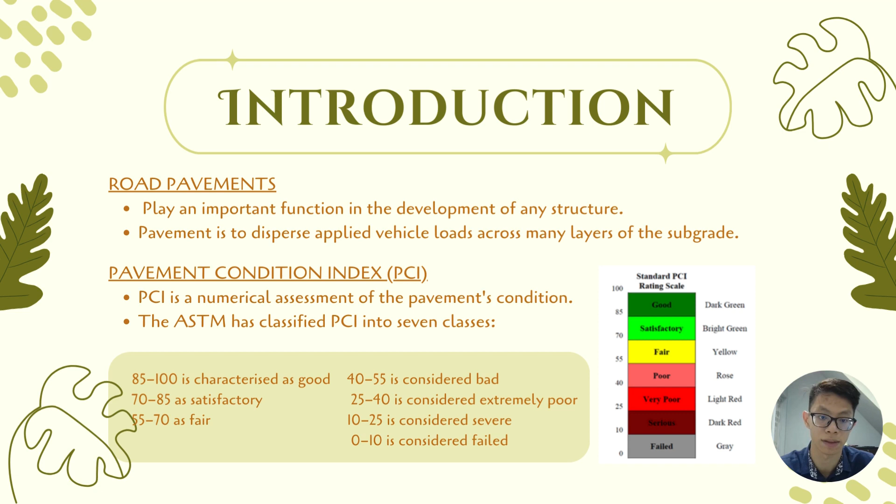The ASTM has classified PCI into 7 classes: 85 to 100 is good, 70 to 85 is satisfactory, 55 to 70 is fair, 40 to 55 is considered bad, 25 to 40 is extremely poor, 10 to 25 is serious, and 0 to 10 is considered failure.

The objectives of this investigation are to determine the pavement condition performance in terms of PCI and identify the type of distress along a 1 kilometer road at Taman Manis, Parit Raja, Johor, and to study the maintenance and rehabilitation methods to improve the road pavement condition.

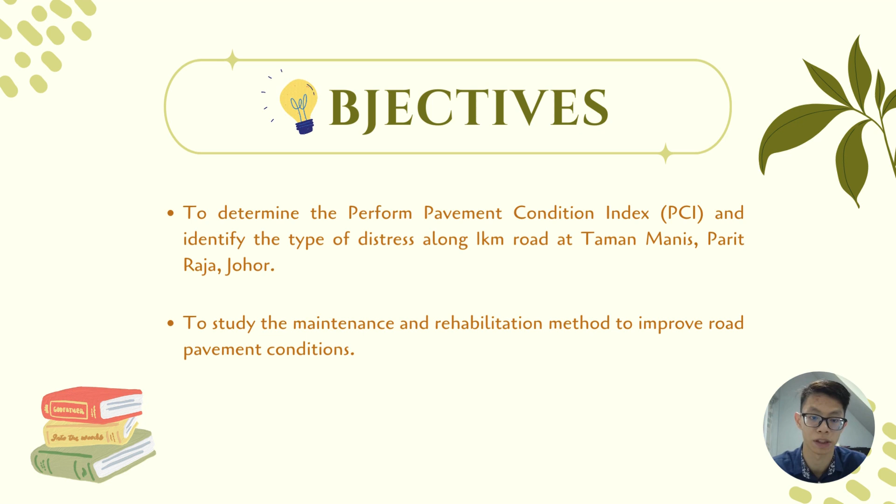Literature review. The Pavement Condition Index serves as a crucial part of road infrastructure for ensuring safe and effective travel. In groundbreaking research by Vitalis Ndume (2020), the traditional PCI methodology was revolutionized by incorporating 9 distress criteria and the International Roughness Index. The findings revealed that combining factors for PCI assessment provides more accurate results than relying on a single parameter.

Muhammad Saleem Zafar (2019) conducted a condition survey on a national highway, using visual distress assessment to estimate PCI. Uncovering 10 out of 19 pavement failures, the study identified potholes, rutting, block cracking, and more.

Next, a study from Professor Dr. Fareed M.A. Karim (2016) evaluated the Al-Fiush road in Yemen, using the Pavement Condition Index as a comprehensive method for identifying surface distress. The study provided crucial insight into route health, and was significant in its strategic approach to maintenance and rehabilitation, tailoring solutions based on the specified distress type and severity level.

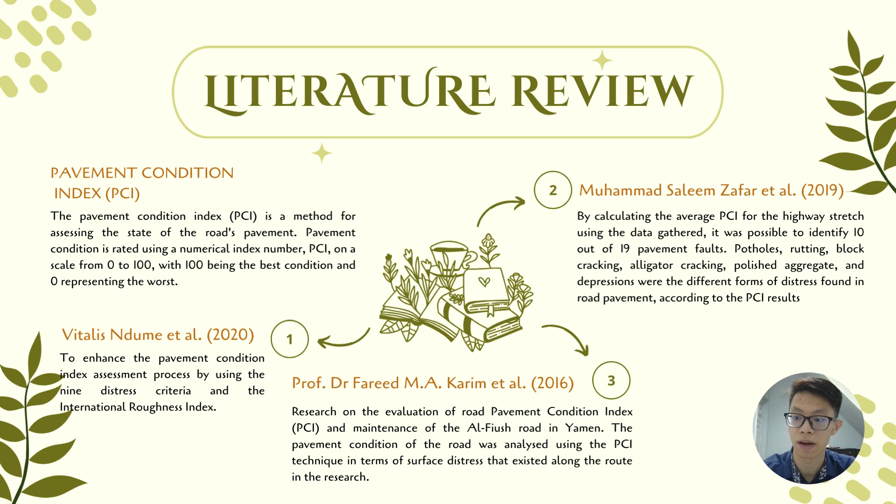This research not only ensures the longevity of the route but also optimizes maintenance resources in the context of limited funds in Yemen. Now, I would like to present the methodology.

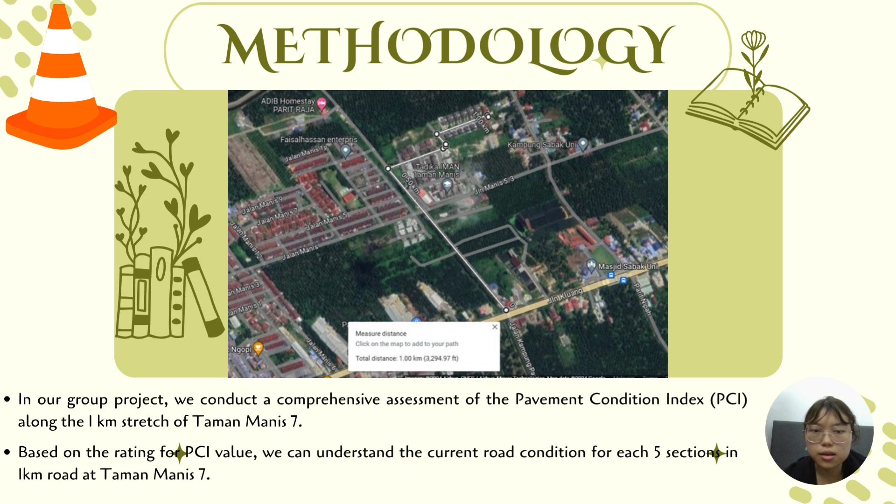In our group project, we conducted a comprehensive assessment of the Pavement Condition Index along the 1 kilometer stretch of Taman Manis. Based on the PCI rating value, we can understand the current road condition for each of the 5 sections in the 1 kilometer route at Taman Manis 7.

In our project, we use the Pavement Condition Index method, which is a numerical scale commonly applied to evaluate the operational state and structural integrity of road surfaces.

In calculating PCI, the results of a visual inspection that identify the type, severity, and quantity of distress are used. Step 1: We determine the sampling interval using the formula equal to the total number of sample units in the section divided by the minimum number of sample units to be inspected.

Step 2: We inspect the sample unit. During inspection and observation, photos were taken to determine distress type, severity level, and measure pavement density.

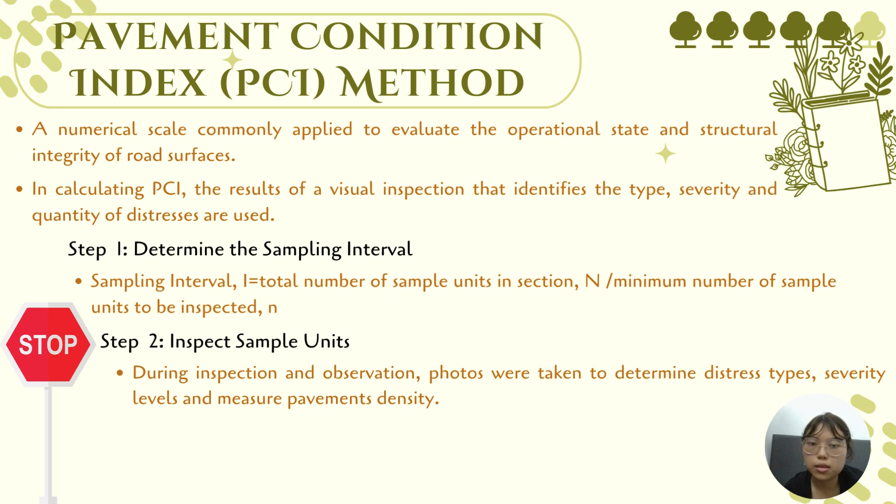Step 3: We need to determine the deduct value. Before that, the totals for all distress types at each severity level are added and recorded, and after that we calculate the percentage of density for every distress type and severity in each sample.

After these two steps, we can get the deduct value for every distress type and severity level combination from the distress deduct value curve for asphalt concrete pavement.

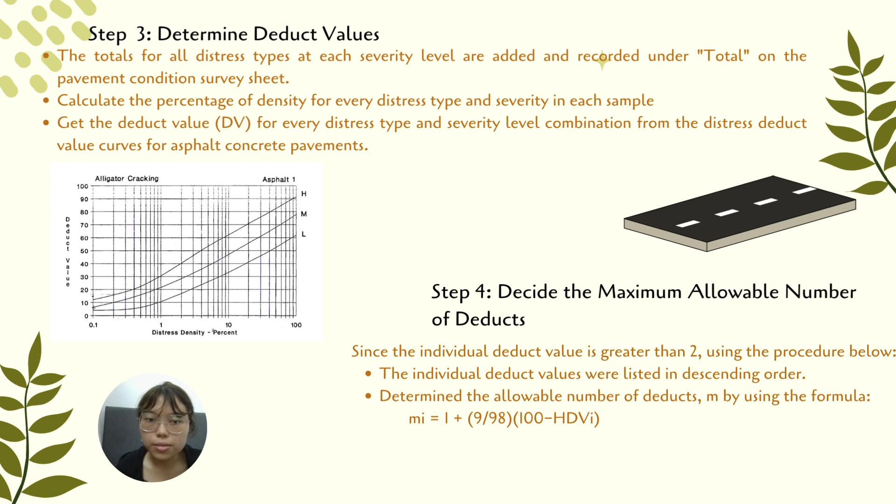Step 4: We need to decide the maximum allowable number of deducts. Since the individual deduct values are greater than 2, we use the procedure below: the individual deduct values are listed in descending order, and we determine the allowable number of deducts using the formula equal to 1 plus 9 over 98 times 100 minus the highest deduct value.

Step 5, we need to determine the maximum corrected deduct value, CDV. Before that, we sum the individual deduct values and determine Q as the number of deduct values greater than 2. Then we determine the CDV from the total deduct value and Q by looking at the appropriate correction curve for asphalt concrete pavement. Reduce the individual deduct values greater than 2 to 2.

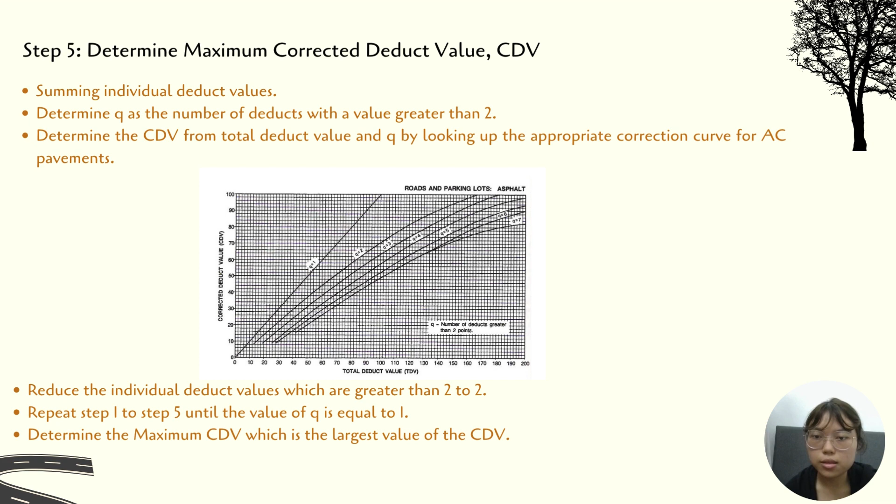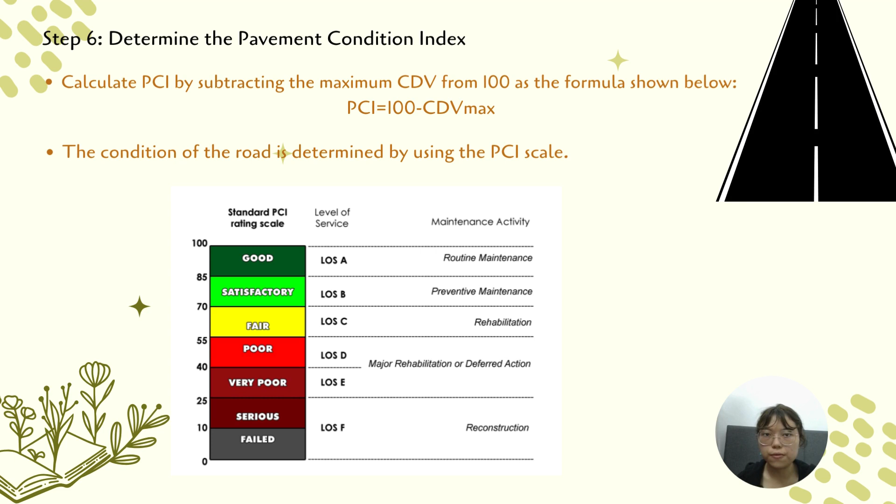We repeat step 1 to step 5 until the value of Q equals 1. After this step, we can determine the maximum CDV, which is the largest value of the CDV. The last step is to determine the pavement condition index by subtracting the maximum CDV from 100, and the condition of the road is determined using the PCI scale.

Now I would like to present the result of Section 1 in Jalan Taman Manis 7. There are 6 distresses in this section, which are low alligator cracking, low longitudinal transverse cracking, low patching and utility cut patching, low potholes, medium potholes, and medium shoving.

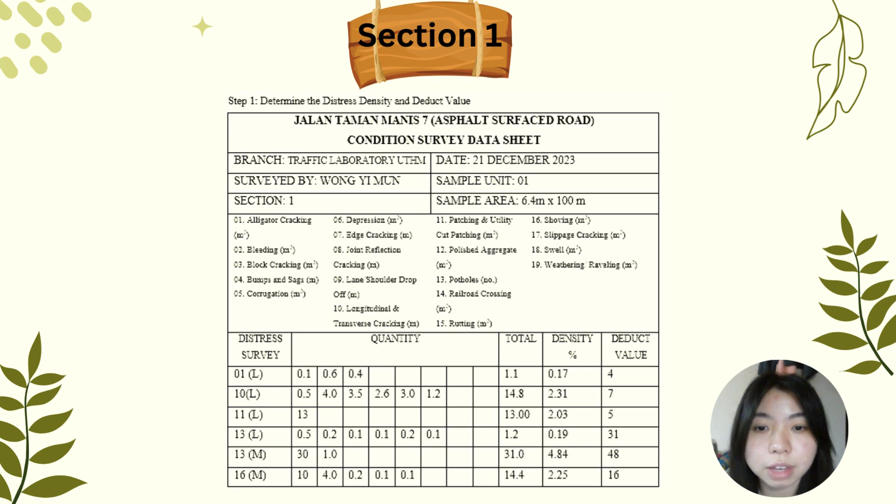After that, we calculate the quantity and the total quantity, percentage of density, and the deduct value. Next, we find the maximum allowable number of deducts. The highest deduct value is equal to 48.

After that, we substitute the value into the equation. We found that the maximum allowable number of deducts is equal to 5.79. The number of deduct values is equal to 6. Since the maximum allowable number of deducts is equal to 5.79, therefore only the first 5 and 0.79 of the 6 deduct values are selected.

Next, we find the maximum corrected deduct value. The number of deduct values greater than 2, then Q equals 6. We found that the total deduct value is equal to 110.16. From figure B45, we found that the corrected deduct value is equal to 54.

Reduce the smallest individual deduct value to 2, Q is now equal to 5, and determine the CDV. Repeat until Q reaches 1. This is the table we calculated. The maximum corrected deduct value is equal to 64.

Determine the pavement condition index using the formula 100 minus the corrected deduct value. We get section 1's value as 36. Based on the rating for a PCI value of 36, this section of pavement is in very poor condition.

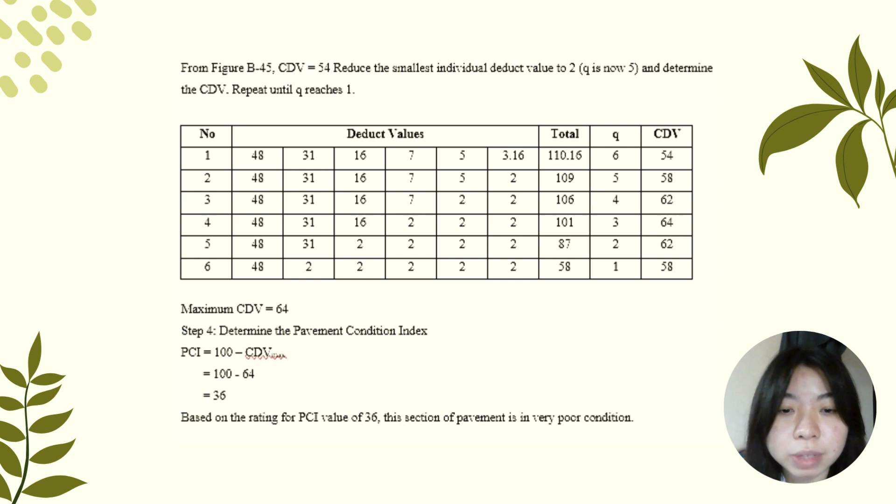Now I would like to present section 2 in Jalan Taman Manis 7. There are 4 distresses in this section, which are low alligator cracking, low lane or shoulder drop-off, low patching and utility cut patching, and low potholes.

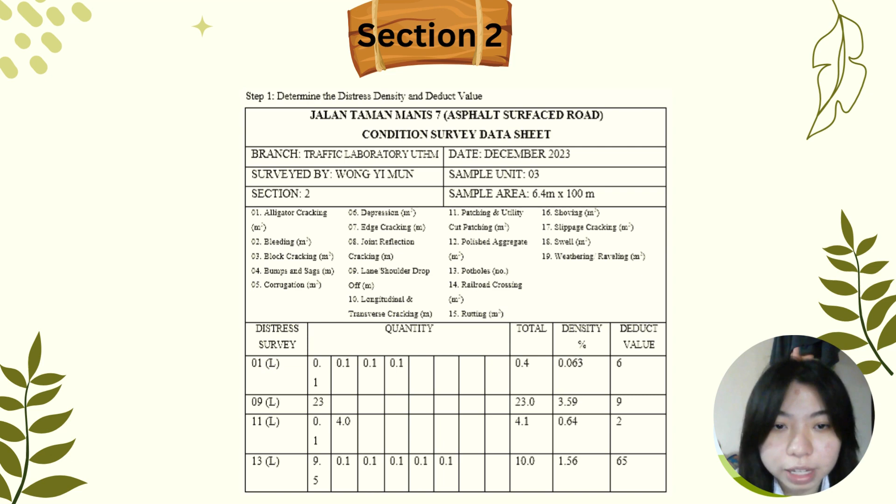We found the total quantity, the percentage of density, and the deduct value. Second step is to find the maximum allowable number of deducts. The highest deduct value is equal to 65. Then we substitute the value into the formula. We get the maximum allowable number of deducts equal to 4.21.

Deduct values in descending order are 65, 9, 6, and 2. The number of deduct values is equal to 4. Since the maximum allowable number of deducts is 4, only the first 4 deduct values are selected: 65, 9, 6, and 2.

Step 3 is to find the maximum corrected deduct value. The number of deduct values greater than 2, then Q equals 4. The total deduct value is equal to 82. From the graph, figure B45, the corrected deduct value we get is equal to 46.

Reduce the smallest individual deduct value to 2, Q is now equal to 3, and determine the corrected deduct value. We repeat until Q reaches 1. This is the table we calculated. We found that the maximum corrected deduct value is equal to 71.

To determine the pavement condition index, we use the formula 100 minus the corrected deduct value. We get the PCI value equal to 29. Based on the rating for a PCI value of 29, this section of pavement is in very poor condition.

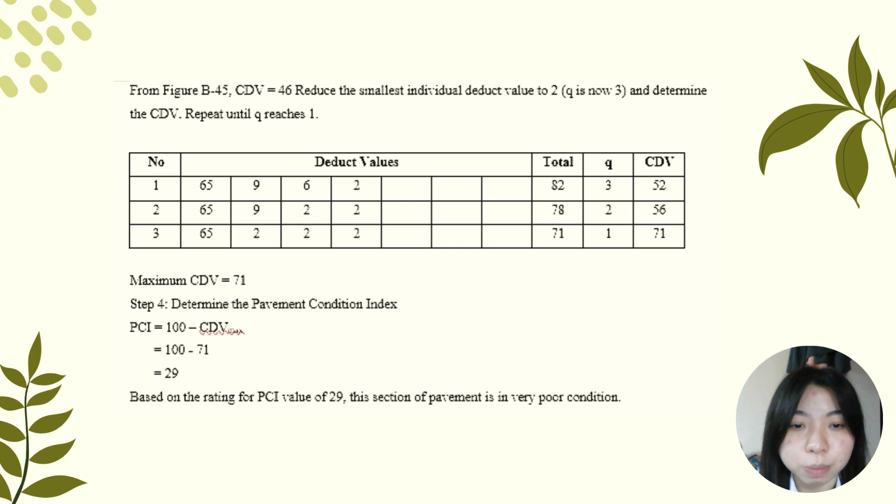So I'm going to explain about section 3.

At section 3, we have found the following defects: 04 bumps and sags, 06 depressions, 09 lane shoulder drop off, 11 patchings and utility, and also 17 slippage cracking.

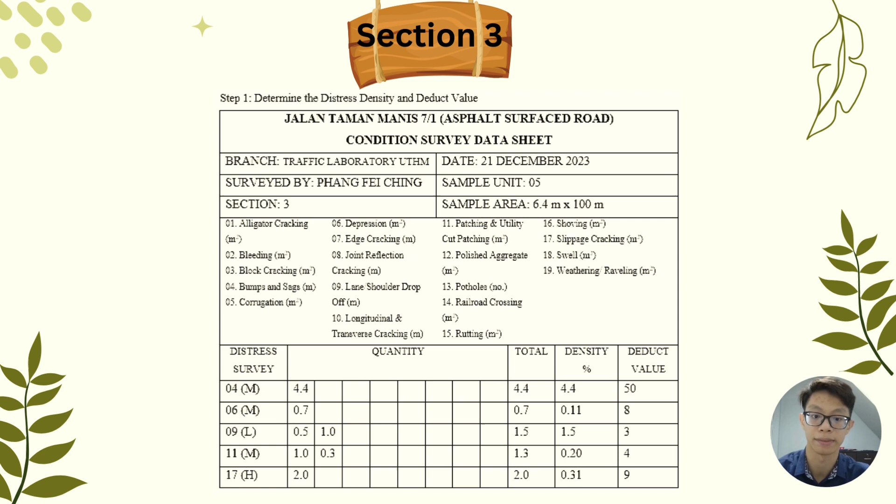Now we proceed to the maximum allowable number of deducts, m. To get m, we need the highest deduct value, which is 50 based on the table above. By inserting 50 into the equation, m equals 1 plus 9 over 98 times 100 minus 50, we get 5.59, and deduct values in descending order are 50, 9, 8, 4, 3.

So the number of deduct values is 5. Since the maximum allowable number of deducts is 5.5, the deduct values selected are 50, 9, 8, 4, and 3. In section 3, for the maximum corrected deduct value CDV, the number of deduct values greater than 2 means Q equals 5.

From figure B-45, CDV is equal to 38. By using the table of deduct values, we can get the maximum CDV is 58.

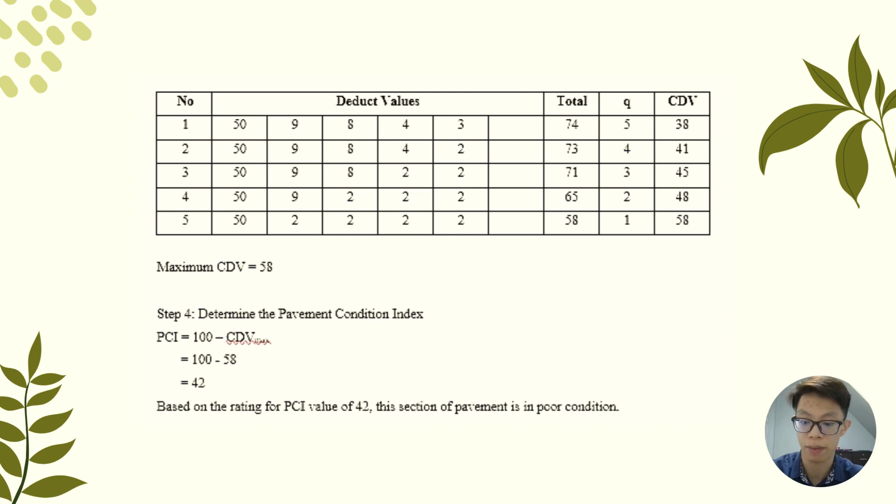So step 4, determine the pavement condition index, PCI equals 100 minus CDV maximum. That means 100 minus 58 is 42. Based on the ratings for a PCI value of 42, this section of pavement is in poor condition.

Now I would like to present the result for section 4, which is at Jalan 7/1, Taman Manis 7. I found 7 types of distress in this section, which are medium alligator cracking, medium bleeding, low bumps and sags, low longitudinal and transverse cracking, low potholes, high potholes, and medium slippage cracking.

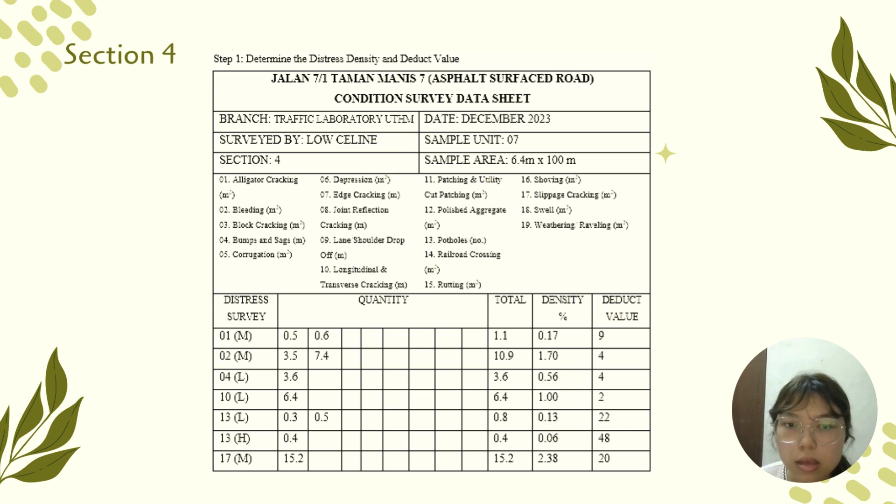After that, I calculate the quantity, total, and density. I also get the deduct value from the deduct value curve for each distress.

Step 2, I calculate the maximum allowable number of deducts using the formula 1 plus 9 over 98 times 100 minus the highest deduct value, which is 48. I get 5.78. After that, I rearrange the deduct values in descending order, and since the maximum allowable number of deducts is 5.78, only the first 5 and 0.78 of the 6 deduct values are selected.

Step 3, I determine the maximum corrected deduct value. Before that, I calculate the number of deduct values greater than 2, so Q equals 6, and I calculate the total deduct value, which is 106.12.

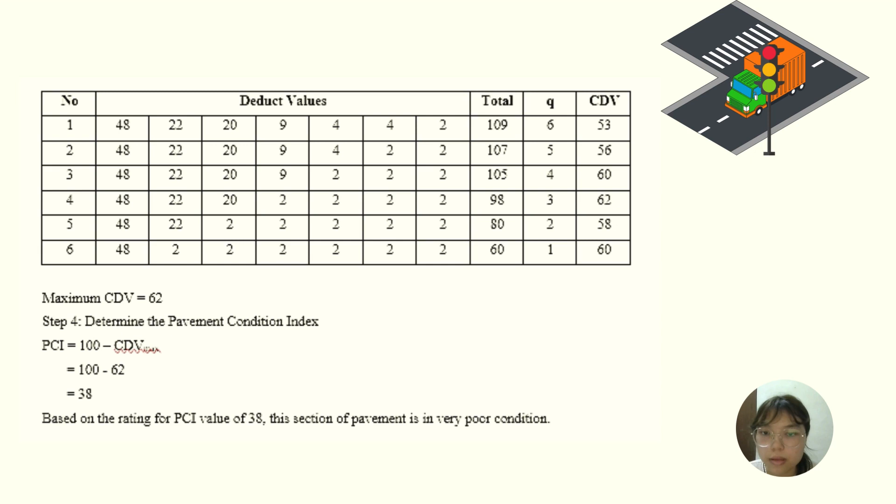After that, I determine the CDV until Q reaches 1. After determining the corrected deduct value until Q reaches 1, I get the maximum corrected deduct value of 62. So I determine the pavement condition index using the formula 100 minus maximum corrected deduct value, and I get 38. Based on the ratings for a PCI value of 38, this section of pavement is in very poor condition.

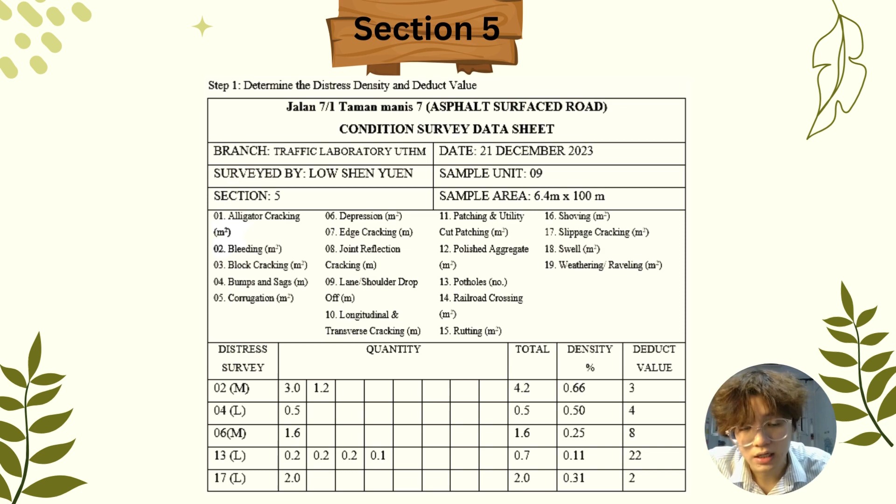Now we come to the last section, section 5. Following the steps shown in the methodology, we can get the PCI value. In section 5, we found bleeding, bumps and sags, depression, potholes, and slippage cracking. The quantity of those problems and the total value, density, and deduct value are shown in the table.

Now we move to step 2 to get the maximum allowable number of deducts, m. The highest deduct value, HDV, equals 22. M equals 1 plus 9 over 98 times 100 minus HDV, which is 22. We will get the value of m equals 8.16.

Then we arrange the deduct values in descending order: 22, 8, 4, 3, and 2. Number of deduct values equals 5. Since the maximum allowable number of deducts is 8.16, the deduct values selected are 22, 8, 4, 3, and 2. Now step 3.

To get the maximum corrected deduct value CDV, the number of deduct values greater than 2, Q equals 4. Total deduct value equals 22 plus 8 plus 4 plus 3 plus 2 equals 39. From figure B-45, CDV equals 18. Reduce the smallest individual deduct value to 2, Q is now 4, and determine the CDV. Repeat until Q reaches 1.

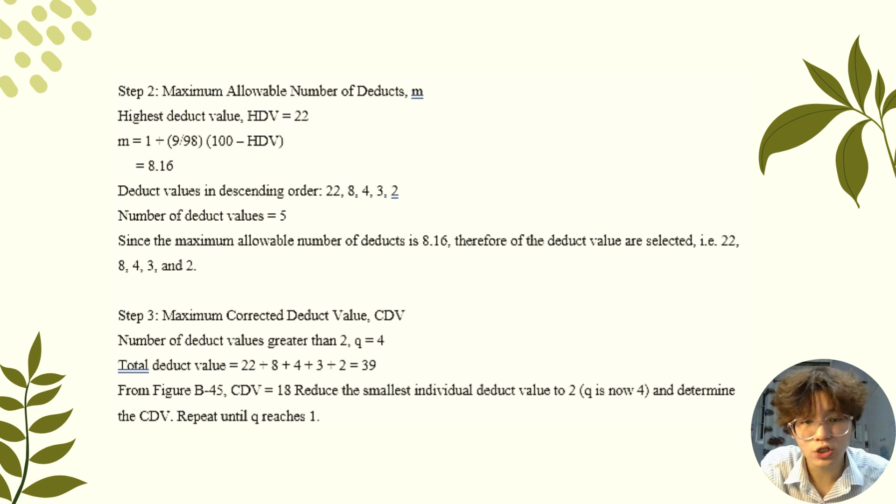As we can see, we arrange all the deduct values into a table and get the total values of the deduct values, then arrange the Q and CDV values. We will get the maximum CDV equal to 30. Then we move to step 4 to determine the pavement condition index, PCI equals 100 minus CDV maximum, which is 30. So 100 minus 30 equals 70. Based on the rating for a PCI value of 70, the section of pavement is in satisfactory condition.

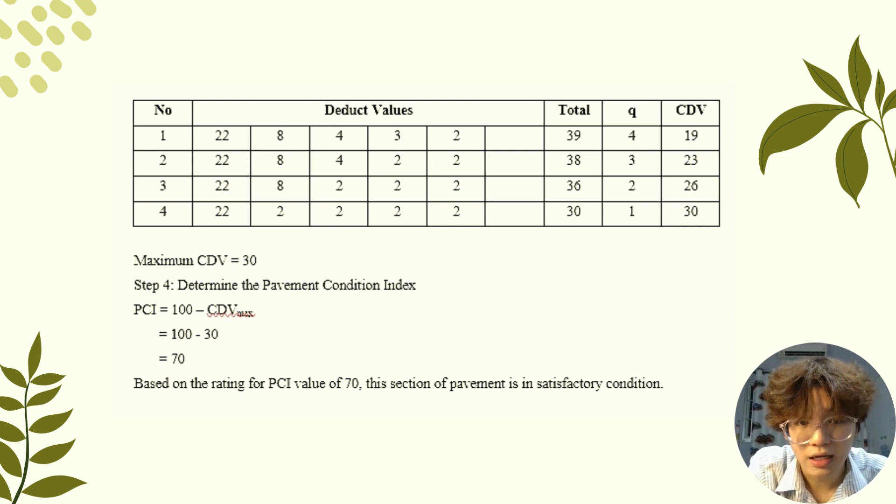Now let's get into the discussion part. We have unit samples 1, 2, 3, 4, and 5. The pavement condition index for section 1 is 36, for section 2 is 29, for section 3 is 42, for section 4 is 38, and for section 5 is 70.

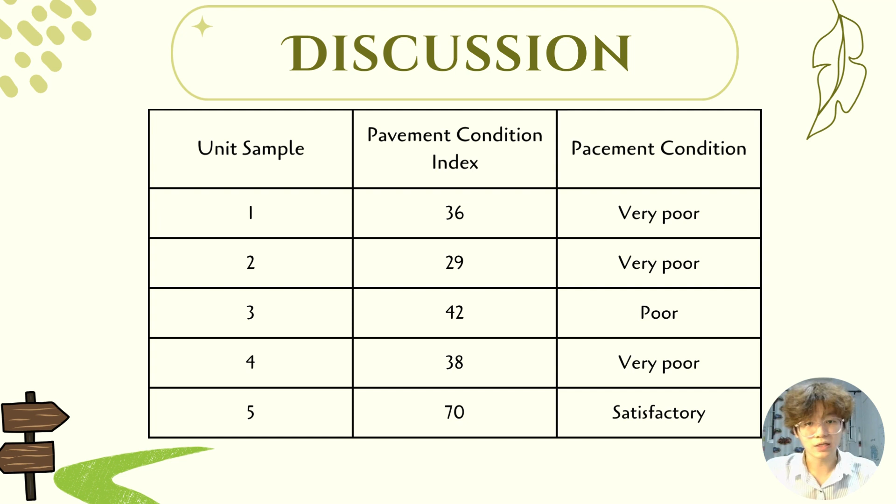The pavement condition for unit sample 1 is very poor, for unit sample 2 is very poor, for unit sample 3 is poor, for unit sample 4 is very poor, and for unit sample 5 is satisfactory.

Unit samples 1 and 2 are located at the entrance of Taman Manis, Parit Raja. This is the main and only way to Taman Manis, so most of this route is used by the residents. There's a row of shops and car repair shops on the left-hand side of this route. It's been observed that no less than 20 heavy vehicles pass through this route every day to replenish the merchants, such that alligator cracking, lane or shoulder drop-off, utility cut patching, potholes, and bleeding will happen due to this situation. All these reasons make the road condition become very poor for sample units 1 and 2.

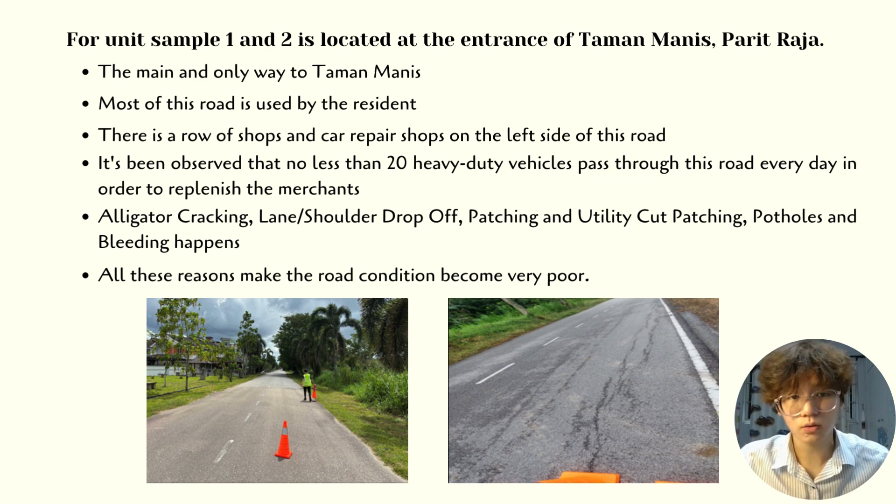Units number 3 and 4 are located at Jalan 6/6 and Jalan 7/1, Taman Manis. It's a common area for Taman Manis. Everyday traffic on that road is inevitable for the residents, with the Taman Manis playground on the left and the terrace houses on the right. This will lead to potholes, bumps, and sags. Owing to a lack of parking spaces within Taman Manis, tenants frequently park their cars outside and along the side of the road. This will lead to pavement edge cracking. In conclusion, the pavement condition of unit number 3 is poor and unit number 4 is very poor.

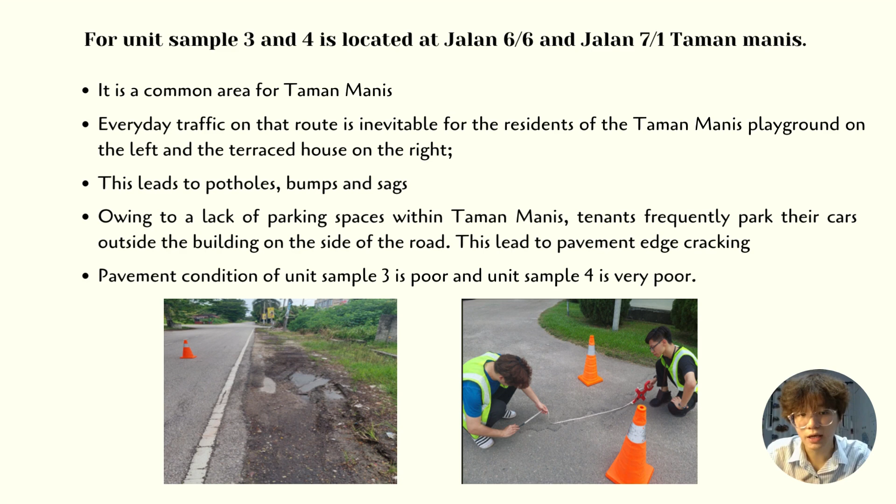For the last section of our project, unit number 5 is located at the end route of Taman Manis. This road is a dead end and only bears minor traffic since it's only used by some new terrace house residents. This situation will lead to potholes, bumps, and sags. Pothole and depression are found in unit number 5, which may be caused by environmental conditions such as change in temperature, freeze-thaw cycles, and water infiltration, which can all contribute to the deterioration of the road surface, so the pavement condition of sample unit 5 is satisfactory.

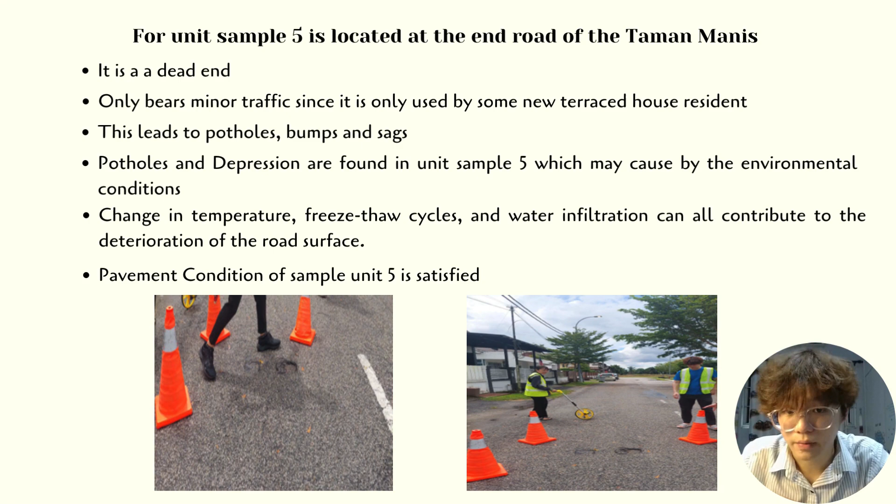Now I'd like to present the maintenance or rehabilitation methods to increase the PCI value. The first method is reconstruction. The pavement condition of samples 1, 2, and 4 is in very poor condition, and the pavement condition of sample unit 2 is in poor condition. There are 3 types of reconstruction: removal of the existing road surface, reconstructing or rehabilitating the road bed, and placement of new road surface.

The second method is routine and preventative maintenance. This is for sample unit 5, which has satisfactory pavement condition. It includes pothole repair, repair of road shoulders, furniture along the side of the road, drainage system, bridges and culverts, as well as routine maintenance and landscaping on protocol roads examination.

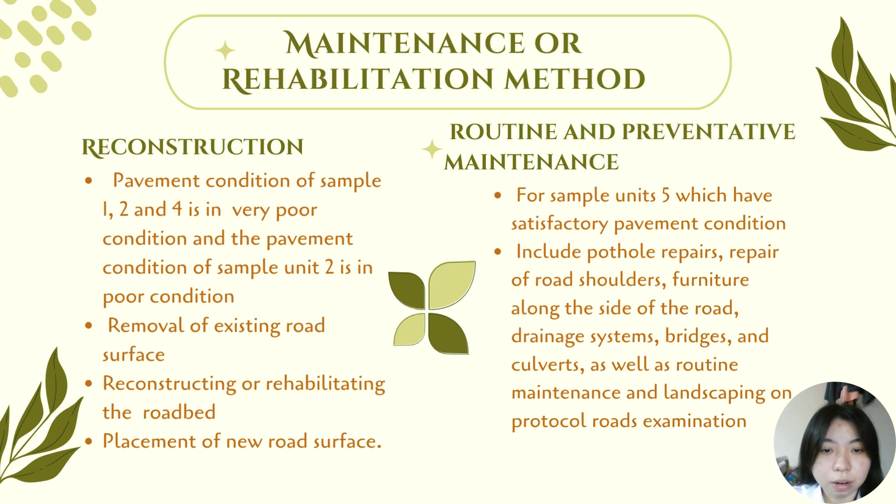In conclusion, from the route of Taman Manis, we found that they have slight alligator cracking, edge cracking, lane or shoulder drop-off, patching and utility cut patching, potholes, slippage cracking, longitudinal and transverse cracking, bumps and sags, depressions, and bleeding. The average PCI of the route is equal to 43, indicating that the route is in poor condition. The suitable maintenance and rehabilitation methods are reconstruction for very poor and poor conditions, while routine maintenance and preventative maintenance are suitable for satisfactory pavement conditions.